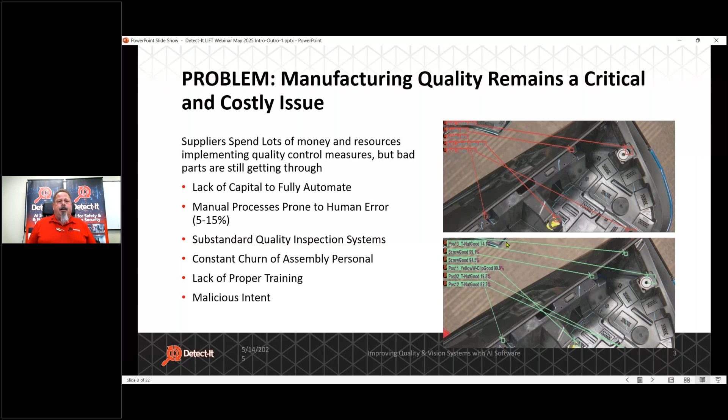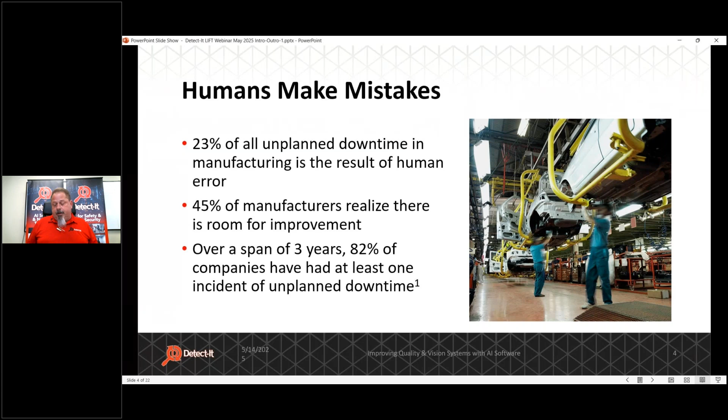This cost of quality is expensive. I spoke before about all the money you currently spend to try to keep bad parts from getting out. But take a look at the cost when it comes back to you from your customer. People spend a lot of money on making sure you didn't send bad parts. Then bad parts come back. Then the customer's mad at you. You don't send them a check for the bad part. They deduct the amount of the bad part from your monthly statement. So you can arbitrate it later with them, but the bad parts are costing you money.

And then if you do too many, they put you in containment where you have to have multiple inspectors, and then you have to pay for a third-party inspector. This is expensive and it's painful, and it hits the bottom line directly on the profitability of a plant or a division. I mean, Ford spent 1.4 point something billion on warranty payments that were basically quality issues that made it out to the customers' vehicles and came back to dealers. So the cost of this poor quality is tremendously expensive, and sometimes it's not easily quantifiable, but everybody knows what it feels like and what it's like to have these problems.

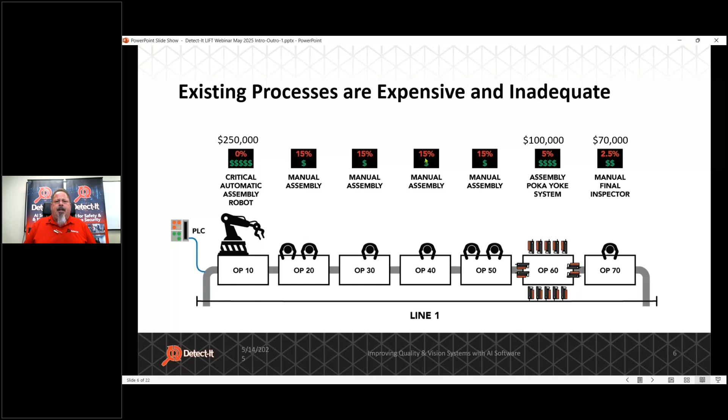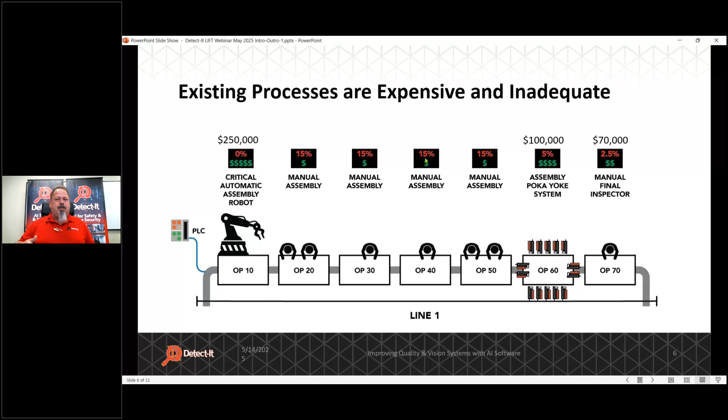Now, when the vice president of the company comes walking through, the person at Op 70 is not there. The error proofing systems are all turned on, and everyone's told to make sure the parts are all good going through the error proofing system. And then as soon as the vice president walks past and gets out of the plant, the error proofing goes into bypass. Charlie comes back to Op 70, and the work continues again just as it was yesterday, and bad parts get out the door.

So back up. So what's the solution? We spend all this money, we still get parts going out the door. You can't automate your way out of it because you don't have enough money. Everything else has been tried. I mean, we have lean manufacturing. We went through all of that. We've got all these other systems we've bought and tried, and all of it's not working. Bad parts are still coming back. And I'm praying that Peter catches the bad parts before they get out the door, back to humans again.

So the answer really is to deploy true neural network-based visual detection AI to do the work that humans do. It's basically human level vision without the mistakes. Now, the one key factor is that it needs to be running in live video. You can't be taking a picture at a moment in time and then trusting nothing changed after that picture was taken. It all needs to run live in video, just as if a human was watching it, but without the mistakes that we make, right?

So this technology is fast, it's reliable, it's accurate, it's very accurate. I mean, people debate on human inspector accuracies. Most of the time they argue if it's 95 or 85% accurate to have humans inspecting parts, even with double inspectors. But this stuff is up in the 99.9 accuracy without making mistakes.

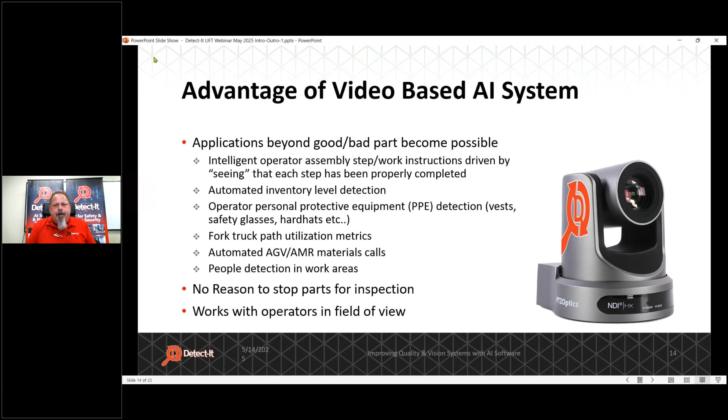So a lot of people use us for PPE, a lot of stuff, inventory. I'll show you some examples. But there's a lot of advantages to video-based AI that you can take advantage of.

But basically, we have Net Builder and Net Runner. Builder's your development environment. It's your AutoCAD. It's your SolidWorks. It's what you use to develop everything. And Runner is the runtime environment that runs it, talks to PLCs, talks to MES, reads cameras, warns operators.

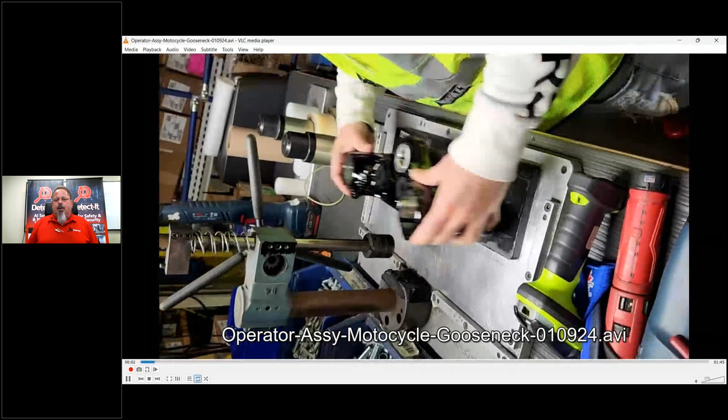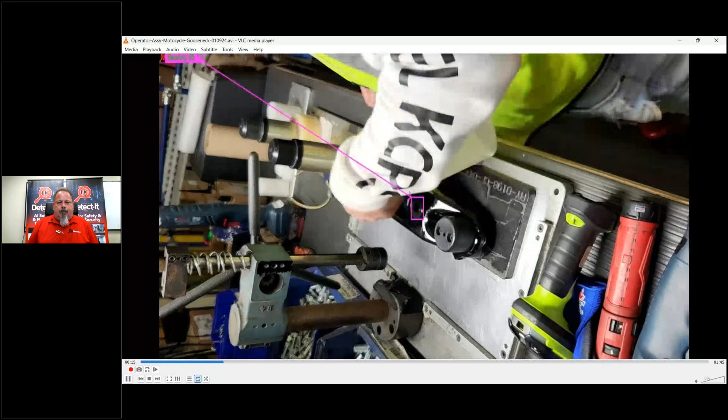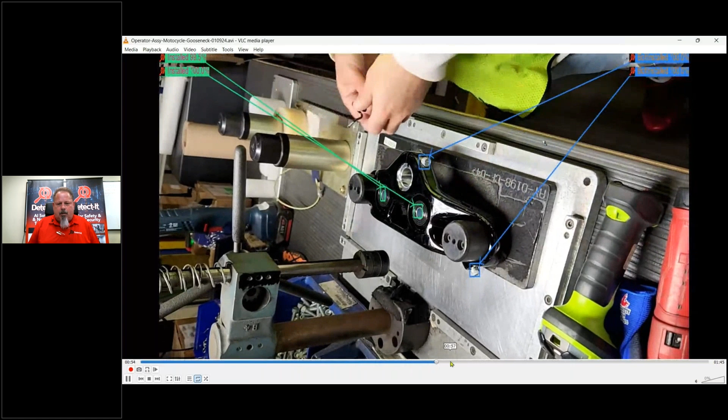So a lot of people use us for operator assembly. And I'll just show you one. This is a motorcycle gooseneck for, I believe, Harley Davidson. And I can verify that everything is being installed. I'll just skip through a little faster. You don't need to see everything. You get the point. I can see those bushings have been pushed down. I can see certain nuts have been installed. I can see where the operator's holding a torque wrench. Make sure they tighten bolts.

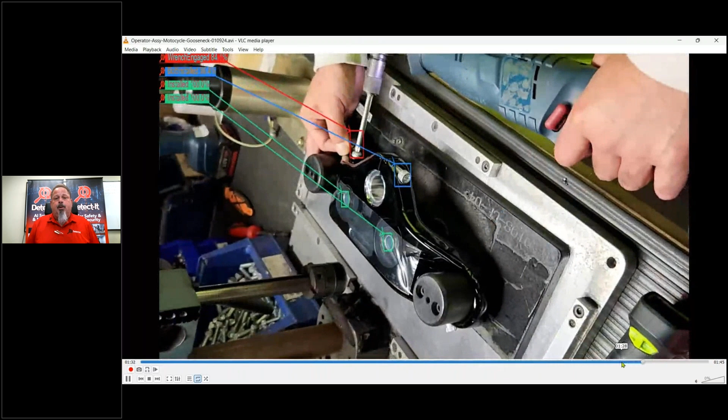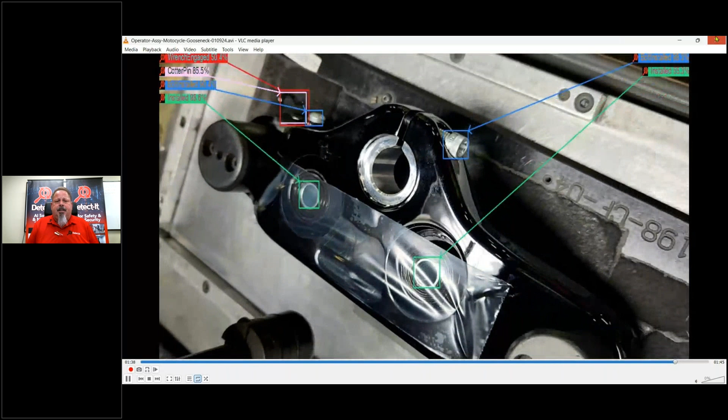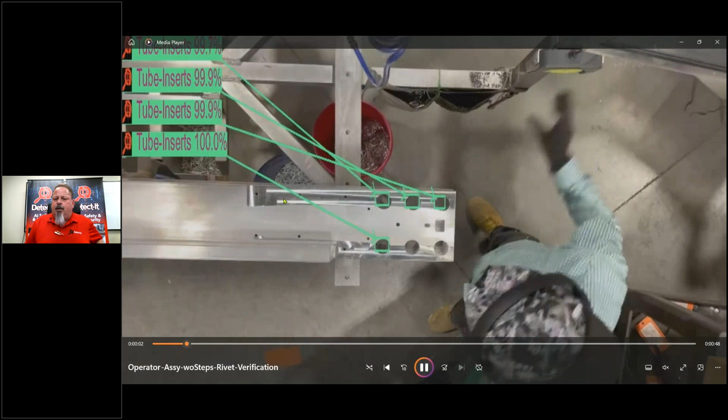So a lot of people use us for spatial tool. What bolt does the operator have the torque wrench on for that? Because I can be used for anything you can see. Our only rule of thumb for detection is you have to be able to see it on a monitor. And if you can see it on a monitor, you could teach someone to sit at that monitor to detect something, then you can teach Detect-It to detect it. I don't care what it is.

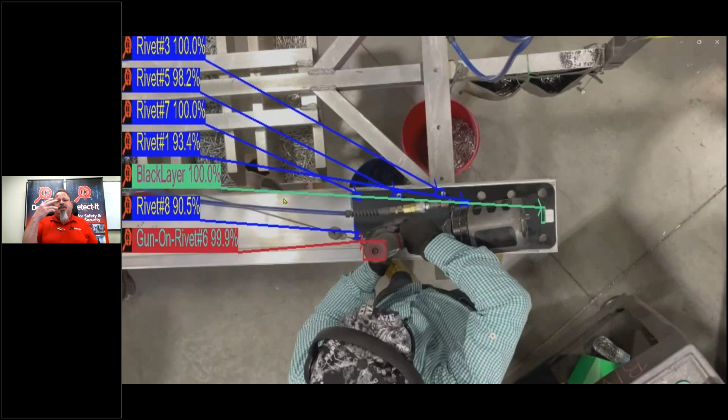Here again, let's help operators. So you can see this person has earbuds on. Operators are not engaged. They're thinking about last night. They're thinking about tonight. They're listening to music. They're talking to their girlfriend. I don't know, but they're not paying attention. They're just going through the motions. And we're not going to have like kumbaya training to get them all on board for paying more attention every day. It's just not going to work. So just help these people be less engaged and not make mistakes.

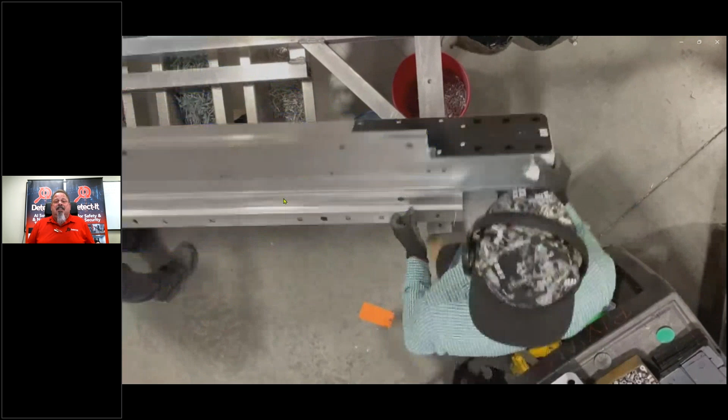I have UAW lines asking when we're getting Detect-It on our line. They got it on their line over there, and we want it on our line. And the only reason they want it is because it allows them to be less engaged with the overall process and not make mistakes. That's basically what they're after.

I have another one, Carhartt label stitching. They're asking the operators to stitch these caps in the label, and they're asking the operator to check the sewing machine because the sewing machine screws up and misses stitches. Now, you would go crazy looking at this stuff all day long, little white stitches on white caps. It's not a good job for us. So we simply stuck a borescope, a $70 borescope, on the sewing machine. The operator pulls the hat back after it's finished sewing to a check position, and we say it's a good hat or a bad hat.

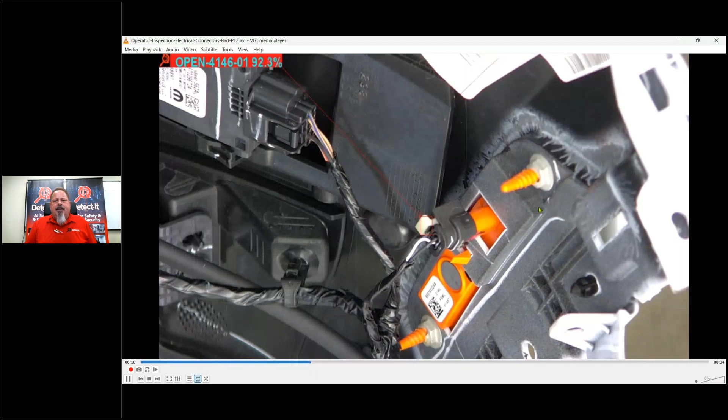This is another one. All these car parts have a million pieces on the back side of them. And we need to make sure stuff is assembled right on the back side. This is a fascia. Let's say something's not assembled right on this, or it's not clicked down. That's electrical connectors. It'll pass continuity. It'll get out of the plant. You'll be driving your brand new car, and in 2 months, you'll start getting some sort of sensor warning. And now you got to go to the dealer, and they have to pull your whole fascia off to fix this thing. God only knows what they screwed up when they pulled the fascia off to fix your other mistakes. So a lot of my customers used us to verify that parts are assembled right.

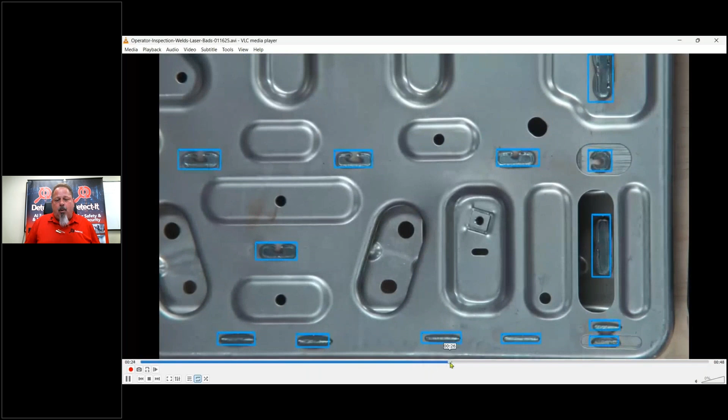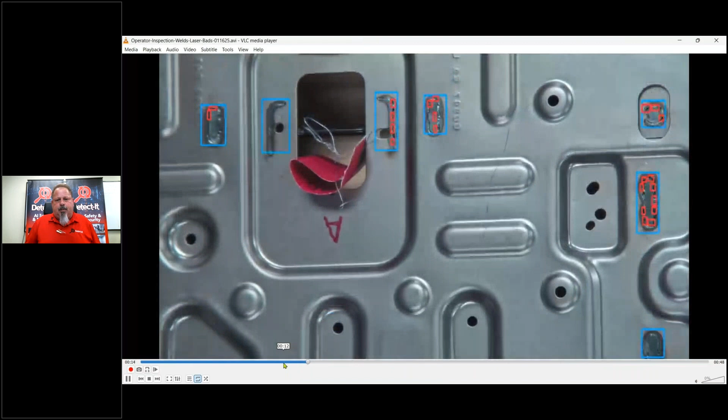This is another one, laser welds. The laser welder screws up, and they got people looking at all these welds to make sure these welds are good before the seat frame, it's a seat frame, gets packed out for shipment to their customer, and they miss stuff. So, you got bad welds, porosity, blow through, things like that, defects. But they're using people to do it.

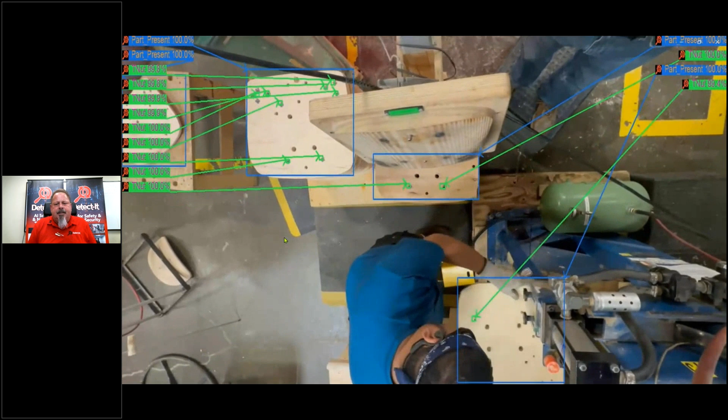Here's another guy in the seat plant for furniture seats banging T-nuts into the seat. So the problem is if this operator misses a T-nut in the seat, this is the bottom, then the thing goes to assembly. They put the foam on, they put the leather on, everything's fine. They get it to put the pedestal on it, and they can't put the pedestal on because they're missing the T-nut in the bottom of the seat. Now they got to unassemble the whole thing, take the leather off, take the padding off, put another T-nut in. Let's just verify that the operator didn't miss something right at the station.

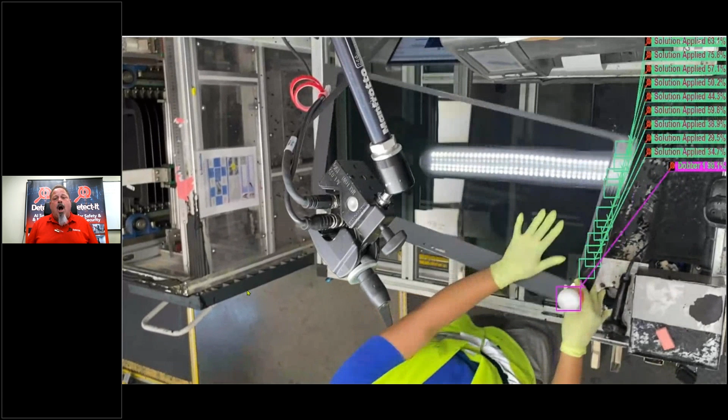This is another one here. Operator is cleaning glass, basically. What they're supposed to do is apply an alcohol wipe to the glass. The problem is the alcohol dauber goes dry and doesn't apply, and the operator is just going through the motions, not paying attention to the alcohol that is dry, and they're actually not cleaning the glass.

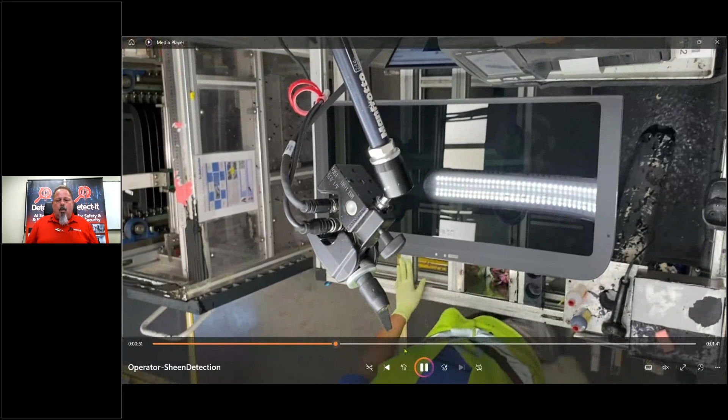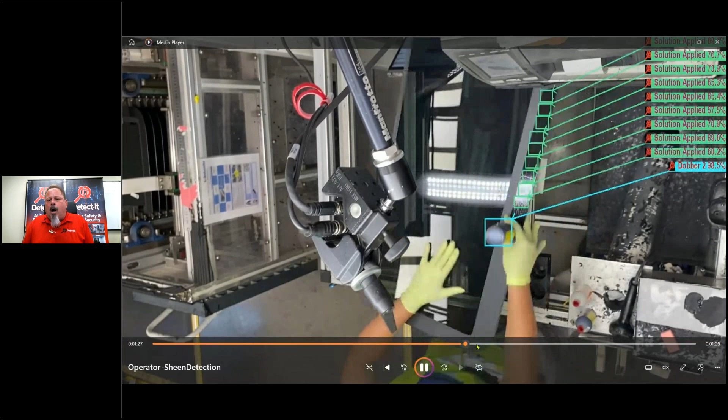So they have to prep the glass with an alcohol primer and a bingo dauber, and then they have to put the paint on itself with another bingo dauber. So we're checking the paint quality and the bead of it, and we're checking that the alcohol wasn't dry. It was leaving a sheen behind the dauber. If it's not leaving a sheen or there's gaps, we stop the press, tell the operator.

We also get used for inventory. So people use us to look at shelves for Kanban, right? It's not quality, it's inventory control, a visual Kanban. Are these bins low or medium or full? Do I need to call for more materials? There's a lot of Kanban systems in the plant, material replenishment systems. They all get used by a button. The operator has to press a button to say, give me more of this and give me more of that and give me more of this. And believe me, operators play games with when they press buttons.

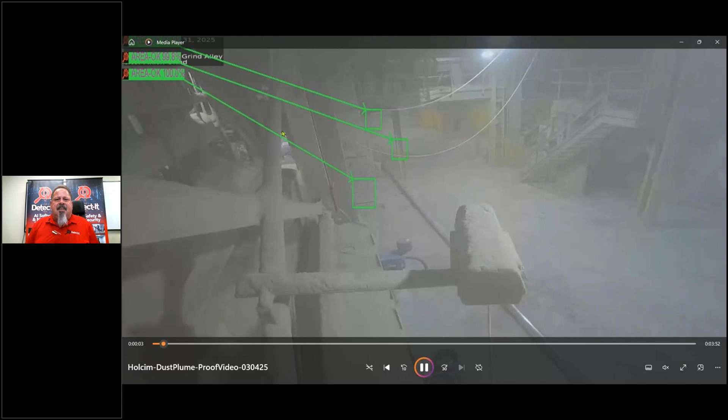Just for the fun of it, I know you all work in factories, and I'll show you this one. This is a dirty factory. If you ever looked at a dirty factory, this is dirty. So this is a cement dust manufacturer in Alpena, Michigan. They make the cement dust powder. And look at it. The problem is that their furnace that makes the powder has a problem, and it starts blowing plumes of dust out.

We train a neural net to detect when the plumes are starting to come out. And slowly you can see like this I-beam will start disappearing as the dust plume starts to unfold. Now you can see it's really dusty. All this plume is pouring out. We're alarming. And eventually a person comes over here to check out the problem. I'll fast forward to that.

But I often laugh because people think they have a dirty factory, and this is a dirty factory. But yeah, so we're detecting a dust plume on the furnace by looking at an area, and when I can't see that area because it's being covered by dust plume, I alarm and they send somebody to do something. This guy just disappears off into the mist, though.

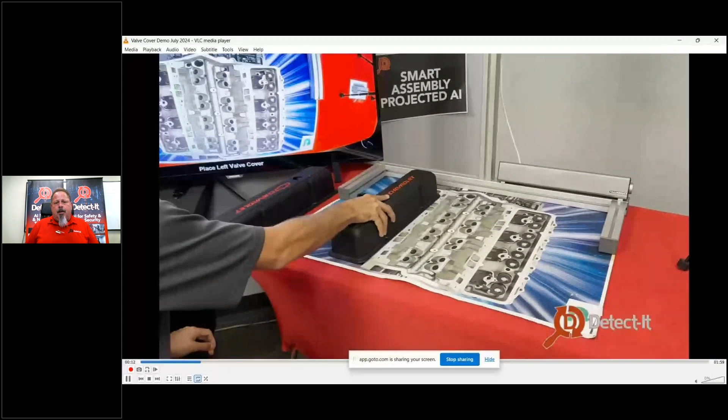So if I can check that the part is assembled right in station before it leaves, I also can do electronic work instructions to help train operators. So I'm using a simple $100 camera over this demonstration where I'm telling the operator how to assemble this engine. Step one, put the valve cover on, but the operator's never been trained. They just stuck the valve cover on backwards. So it told them turn the valve cover around, and it didn't give them step two.

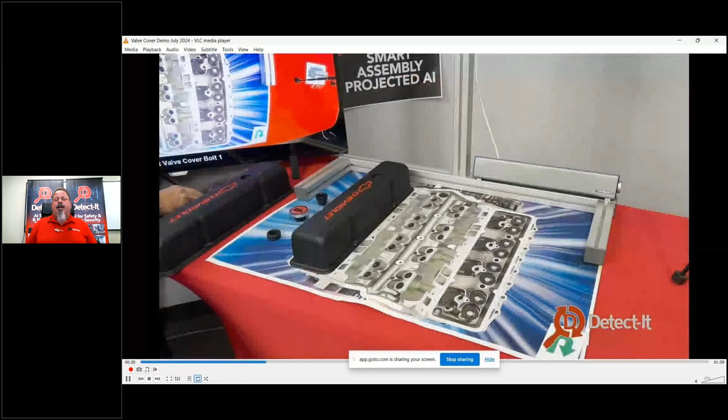Now they're on step two. It's saying to tighten that upper right bolt, but the operator's got the torque wrench on the wrong bolt. That's not correct. So it'll check mark, now you did the right thing. Now we'll do the next step, and it won't give you the next step until I see the current step done properly.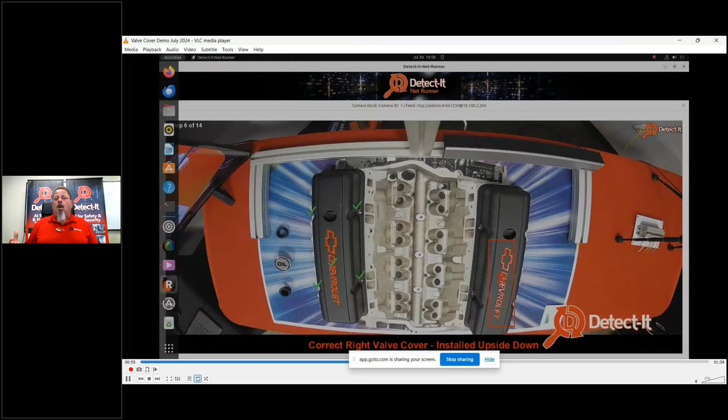So this is where, instead of just checking the whole thing at the end to make sure it's right, which we get used for a lot, we can now do work instruction step by step, which helps train people, because we have new people all the time. And eventually the operators don't even pay attention to this stuff. They just go about the motions, but it catches them when they make that mistake. That's a good visual. Thanks for sharing.

So we got another one. Do you have any situations where you integrate data with other systems, such as MES, quality management, LIMS? All the time, every job. So every job I'm talking to usually one or two things, the PLC that's on the plant floor and the MES system that's up in the IT closet. So the MES people want data, and we provide all this rich data.

So we have a REST API on top of us that we pass all of our detection data with pictures, with information, size, location, confidence, all that stuff up to their upper-level business analytical systems. We also do offer some of our own packages as well, but most of my customers tie it into their existing systems. That's good to know, obviously, because a lot of people have their own systems. So, yep, we have another one.

You showed very high detection probabilities, 98% certainty and higher. How many images needed to be taken during training sessions in order to obtain those levels? Yep, good question. Generally speaking, we run in video. I recommend 200 frames of data on any item or label in the system that you want to train. For most applications for assembly. It's a little different for defect detection. It can be more than 200.